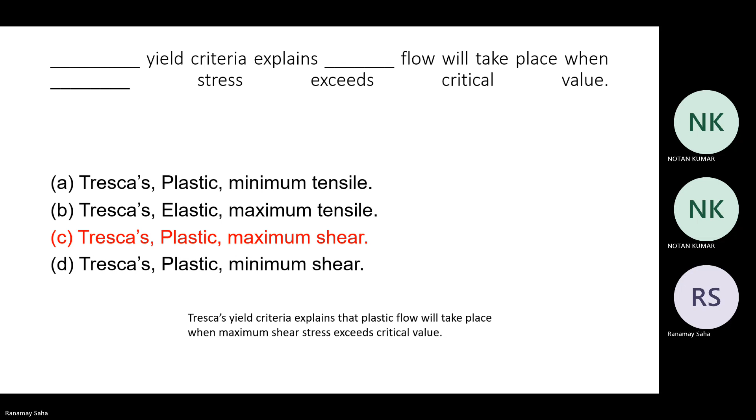So the first question you had to answer about some of the deformation theories. Broadly, Tresca's and von Mises theories, which you are already acquainted with. Now the question asked, the first blank is same for all the options, so you had only Tresca's criteria, and then Tresca's yield criteria explains what kind of flow will take place.

Now you all know that beyond the yield point, there is only plastic deformation. So the second option then goes for plastic, and then it says when the load stress exceeds the critical value. Now, because principal stresses are dealt with by Rankine's theory, in this case you have the maximum shear stress being the third answer here. The Tresca's yield criteria explains plastic flow will take place when maximum shear stress exceeds the critical value.

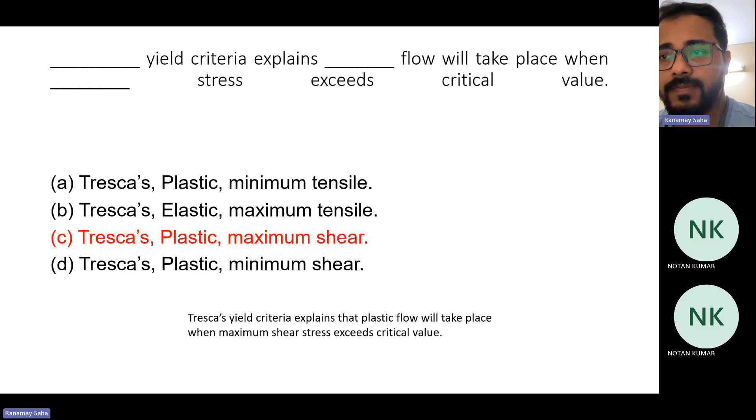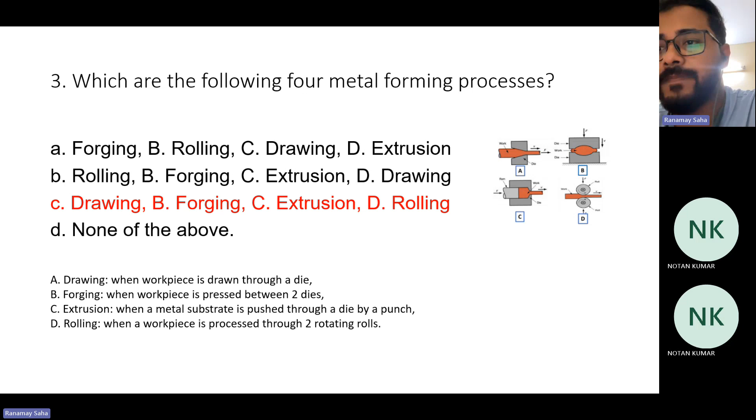The next question was: metal forming is caused by what kind of effect on the workpiece. You all know plastic deformation is the main reason behind any metal forming or change of material shape, right? So that plastic deformation should be the answer of this question, and the other options are wrong.

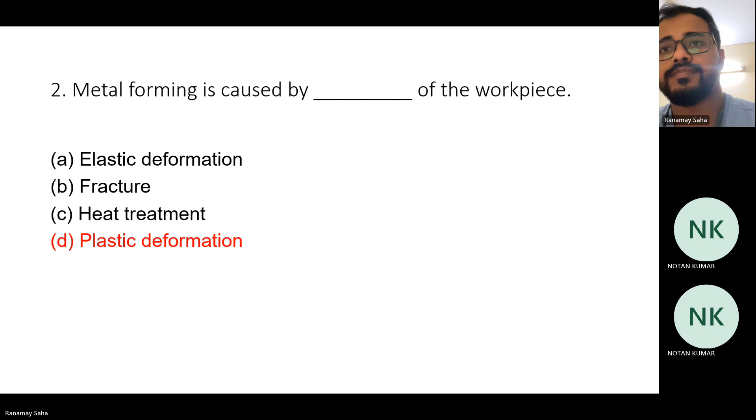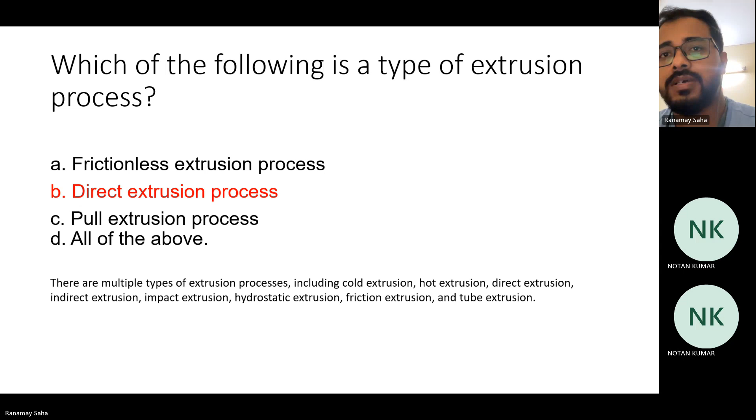Then, which of the following is a type of extrusion process? You know there are direct, indirect, and hydrostatic extrusion processes. In this case, option B comes within the limits of extrusion processes. There are multiple types, including cold, hot, direct extrusion, impact extrusion, hydrostatic extrusion, and friction extrusion. Option A is frictionless here, so that goes wrong. Option B is the correct option.

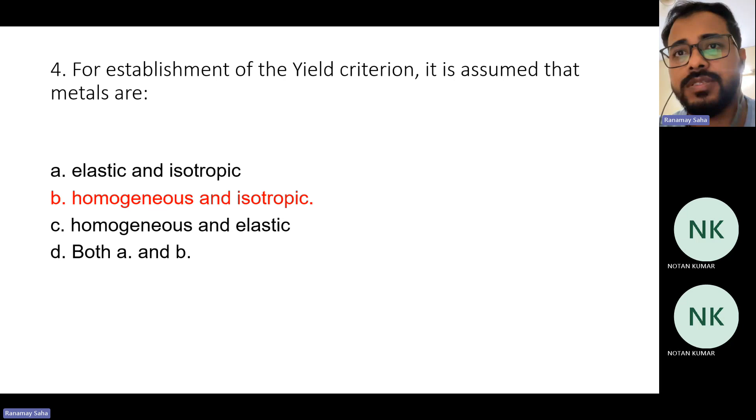The next question was about the establishment of yield criteria. It is assumed that metals are homogeneous and isotropic. We have discussed that in the beginning of the last session elaborately, so you can please have a look if you have doubts on this. There are two assumptions; the first one is considering the material as homogeneous and isotropic for the establishment of yield criteria.

Then, in a rolling process, the two rolls must rotate in opposite directions. Otherwise, if they rotate in the same direction, it will be difficult to actually draw or pull the sheet within the two rolls. So option A is again the correct option here.

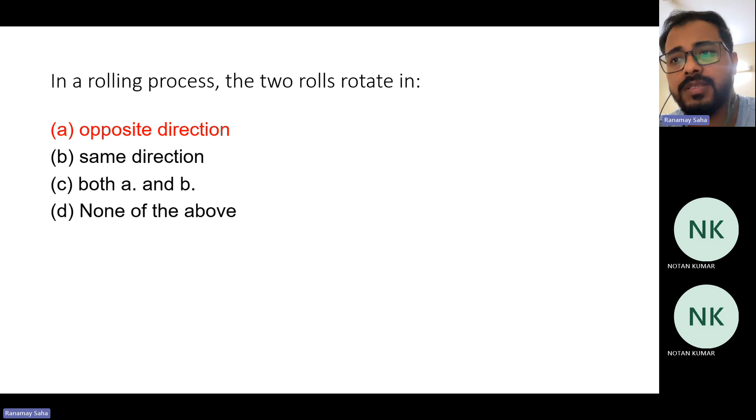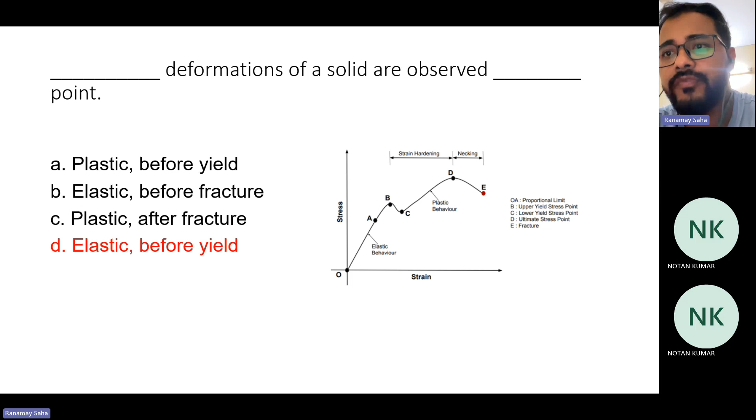The next question is: what will be the true strain in a metal specimen if it is stretched from one length to another. You all know how to find true strain. If you put the negative sign, it comes out as the natural log of final length to initial length. Just plugging in the values, final length is 25 centimeters and initial is 17.5. You can see that option C, minus 0.357, will give you the correct answer.

The last question was here. We have extensively solved much bigger problems from this kind of concept, flow stresses and strains. In this question, it was a simple solution. You have to find out the final true strain and flow stress, when the average flow stress is given as 493 megapascal, the strength coefficient is 680 MPa, and the strain hardening exponent is 0.25.

So you know when there are plastic deformations and non-linear strains that a material experiences, the average flow stress is given by the ratio of K, the strength coefficient, times epsilon strain to the power of strain hardening exponent n, divided by 1 plus the strain hardening exponent n. Just plugging in the values, where strength coefficient is given as 680, strain hardening exponent is given as 0.25, true strain is given as 0.675, the flow stress then becomes epsilon raised to the power n, so it is 616.25 megapascal.

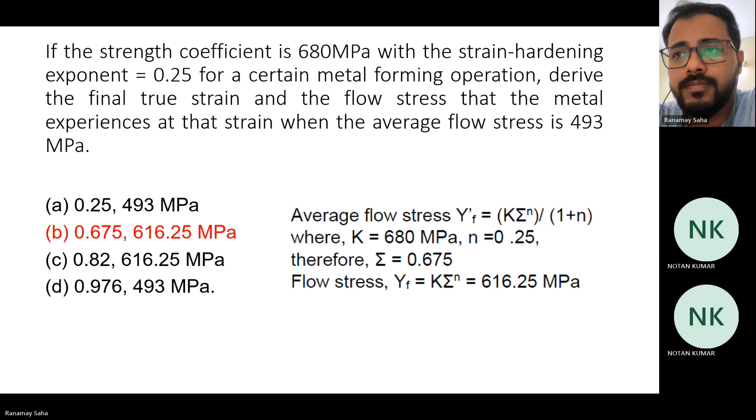Now we'll move ahead to solving some questions from the current content. I think you have come across this single crystal growth process called the Czochralski process. This question is based on that process. You have crystal growth of silicon at a temperature of 25 degrees centigrade. Convective heating is utilized to melt silicon at 1400 degrees centigrade. You have to find the pull rate of the seed through a fusion zone of 100 centimeter thickness, given that the heat conductivity of silicon is 2.3 watt per centimeter Kelvin, the latent heat of fusion is 1787 kilojoule per kg, and the density of silicon is 2.33 grams per centimeter cube.

Just to give you an idea, you must be aware of the Czochralski process, where we put a seed in a chamber where inert conditions are maintained, and as the seed is rotated and pulled out, the melt silicon simply gets attached to the surface of the seed, and as it is pulled out, we get the solidified silicon material. Now, one problem that arises is that some extra material also gets stuck, and that needs to be removed after the process is completed.

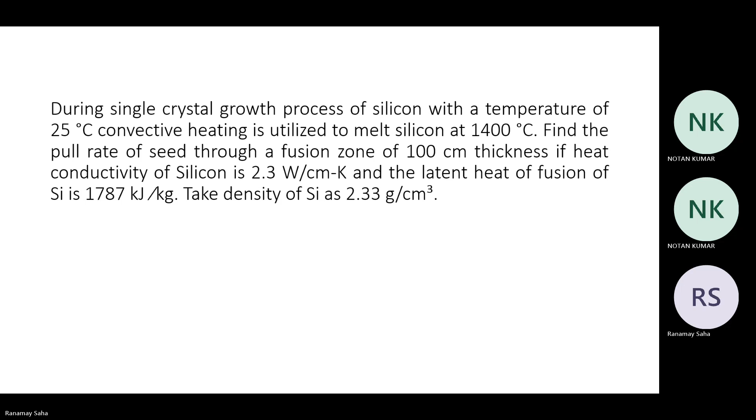So, Nutan, can you hear me? Yes sir, yes sir. I just had a chat with the NPTEL TA for this question. Now, in this question, you are saying the minus sign should not be there, right? Yes sir, why? Otherwise, the magnitude is correct. Yes. Magnitude is correct.

So for your information, if a wire or metal specimen is stretched, the stretching happens in the longitudinal direction. But when a material is stretched in the longitudinal direction, it can automatically be compressed in the lateral direction. So if somebody is talking about the longitudinal strain, it should be positive. If somebody is talking about the lateral strain, it should be negative. Here in this question, they didn't specifically mention whether it's longitudinal or lateral strain they're talking about.

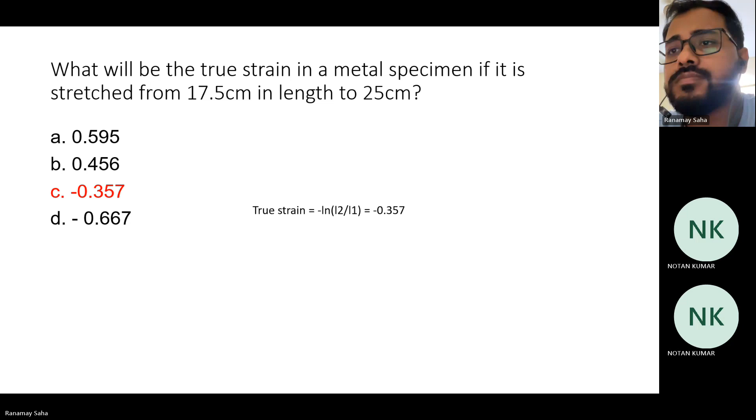But sir, please inform them about the three questions also. Yeah, don't worry. But the solution has already come out, no? Sorry sir, the solution has already come out. Sir, your voice is not coming clearly. What are you saying, sir? I am saying for the three questions from assignment six, I think you are asking, right? Yes, yes, yes sir. And why didn't you mention those in the last session?

Because by now, I think they have already graded that assignment. But sir, it can be changed, it can be regraded. So regrading has also been completed, no? But sir, I have mailed them, I have not informed you, but I have mailed them. But they have not changed the grade, I think they have thought their solution is correct. But I can clarify with discussion, so I thought I should join this live meet and inform you, and you can contact the NPTEL team and inform them. Okay, don't worry, I will forward it.

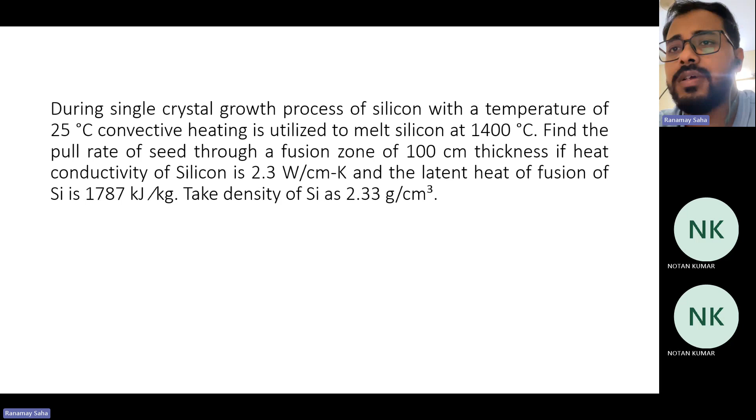So let's look into this question of single crystal growth process. It is a simple concept. You just have to think about what will be the heat transfer process happening while the seed is being drawn out of the melt pool. Right now, you have to equate the total heat transfer loss to the total heat transfer gain.

If you think about this rectangular part at the top of the screen, you can see the seed, where one side is connected to the molten melt side, and the top side is connected to the ambient, where solidification happens. So if Q1 is the heat transfer rate in the melt pool side, and Q2 is the heat transfer rate in the ambient side...

You have temperature T1 in the melt pool side and T2 in the ambient side, so T1 should be greater than T2. So T1 being towards the melt pool side, you use the Fourier law to find out the net heat transfer rate and equate it to the total energy transfer in case of phase change, given by latent heat of fusion multiplied by the mass flow rate, dm/dt.

K stands for conductivity, A stands for the area, and dt/dx is the thermal gradient. The coefficient L stands for the liquid melt side, and S stands for the solidifying upper ambient side. So you equate the total heat transfer rates, and then break down dm/dt, mass flow rate, into rho density multiplied by A and v, area and velocity.

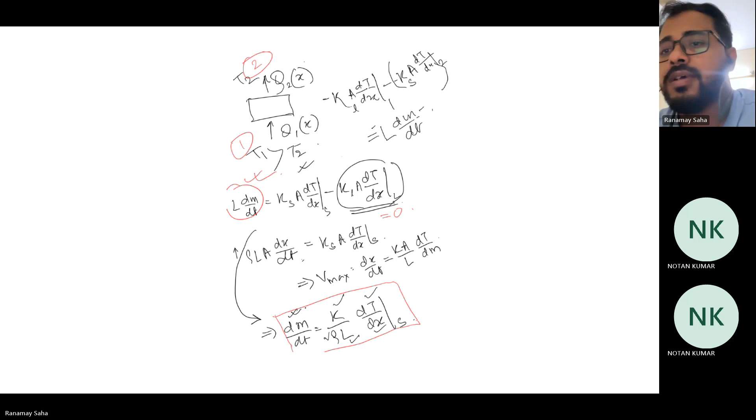Once you find this rearranged formulation, you plug in the values: the temperature difference is given by Tm and T-naught difference, which is 1375 degrees centigrade. From the question, the total distance dx is around 1 meter. Thermal conductivity K was given as 2.3 watts per centimeter Kelvin, converted to meter Kelvin by multiplying by 100, and the latent heat of fusion is 1787 kilojoules per kg.

The density is 2.33 grams per centimeter cube, which converts to 2330 kg per meter cube. Plugging in all these values, you find dm/dt as 9.1 times 10 raised to the -5 kg per second, which is the pull rate asked in the question. Take note of this, and then we'll proceed to our next topic.

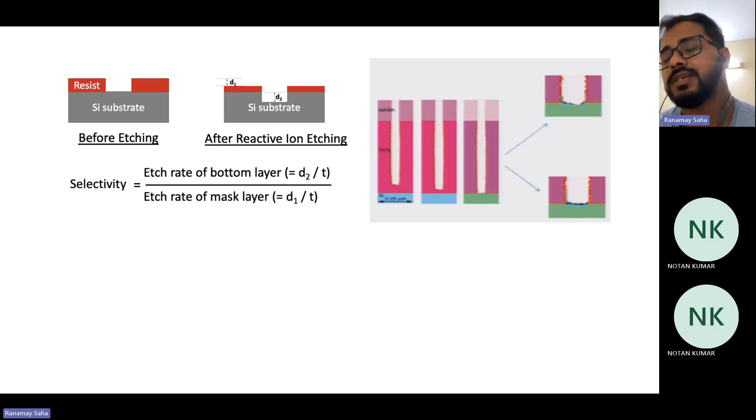In these two situations shown in the diagram in the top right corner, in the first diagram you can see the etch selectivity is really poor - it is low etch selectivity. What's happening is the bottom surface is getting overetched. In the second situation, you can see comparatively better etch selectivity, a highly selective etching process. So low etch selectivity gives rise to poor etching, and high etch selectivity gives rise to good etching.

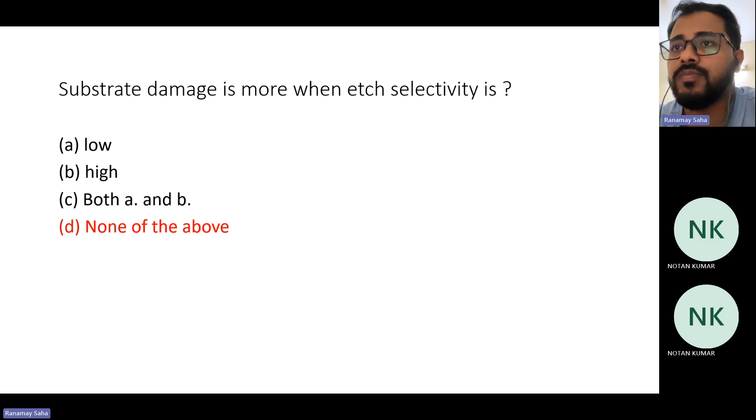Now let's come back to this question. It says substrate damage is more when etch selectivity is what? As per our discussions, substrate damage will be more when etch selectivity is low. Here the answer is wrongly marked. Option A should be the correct one here - substrate damage happens to be more when etch selectivity is low.

Now let's look into a question. A microchannel is being etched in a 100 planar wafer with KOH solution. You have to find three answers. First, determine the angle between the channel wall and the front surface - that particular angle is defined as alpha. If you look at the first diagram, it is the angle between AB and BC, the angle between the channel wall and the front surface.

The second question: if the top channel length and the etch rate are 100 microns and 1 micron per minute, find the bottom channel width after 20 minutes of etching. If you can find the top channel width, you can do geometrical calculations to find the bottom channel width. The last question is how long will it take until the etching process stops - find the total time of etching. Give it a try and then we will discuss the solution.

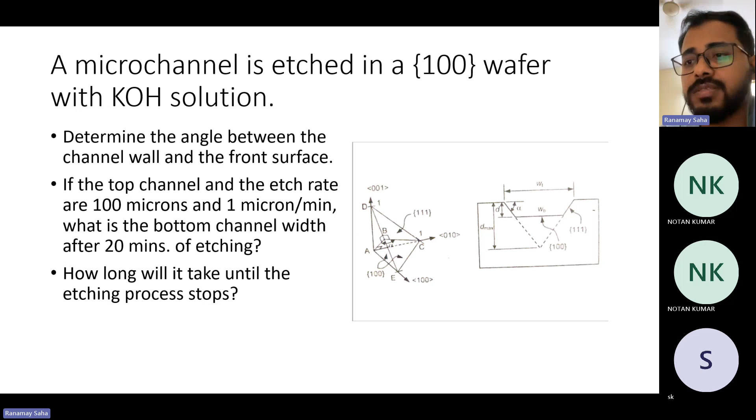Let us look at the solution. I have enlarged the part being asked in the question - the angle between the channel wall and the front surface. AE is a 100 plane, and AC is a 010 plane. Using simple tangent angle, you can find the length of AB to be root 2 by 2, since cos 45 is 1 by root 2. AC here is 1, as given in the question. So you find the angle as tan inverse of AC upon AB, which gives around 54.74 degrees.

The second question was to find out, after 20 minutes of etching, what happens to the bottom channel width. I've shown pictorially which part is being asked about - the bottom channel width. The top channel width is given as 100 microns, as you can see from the diagram, and the etch rate is given as 1 micron per minute.

If you consider that unknown portion length as d, it can be found as the etch rate, given as 1 micron per minute, multiplied by the total time of etching, which is 20 minutes. Multiplying that, you find the value of d to be 20 microns. Now there are two symmetric lengths y on both sides, which is the difference between the top surface width and the bottom surface width of the channel. So you can find y as d upon tan of alpha.

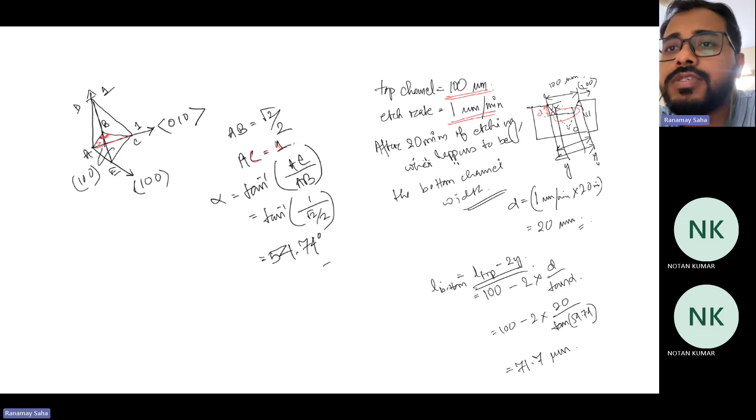Now we have the third question: how long will it take until the etching process stops? So now you know L bottom, and you have to refine it so that you can find the maximum stretch of the etching process, in order to find the time when the etching process stops.

In that case, you have to find out the maximum D. So D max, then from that equation you just have to reshuffle. You have to find what happens to the maximum d when L bottom becomes 0, so L top minus twice of D tan alpha, D upon tan alpha, equals 0. Just reshuffle and find D max to be 70.71 microns.

Once you have found D max, you can find the time by dividing it by the etch rate, since time is distance upon velocity. Here D max becomes the maximum distance of etching, and when D max is reached, the bottom channel length becomes 0. That gives you the time at which etching stops, when the process is completed and there is nothing left to etch in that hole, making it a through hole. That time is found by D max upon the velocity, which is 1 micron per minute, coming out to 70.71 minutes.

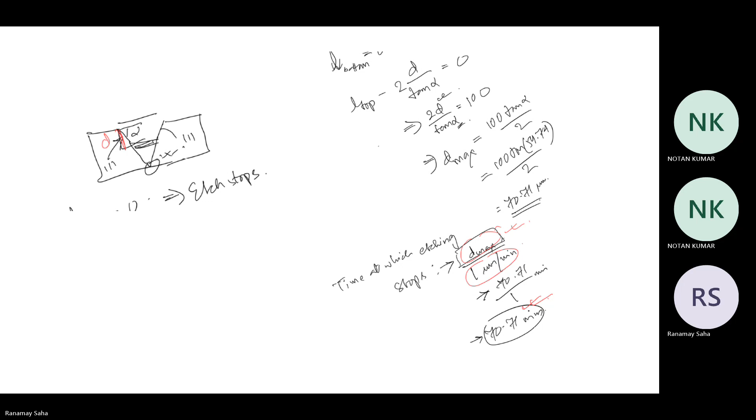So we have reached the last topic of today's discussion: the photolithography process. It's an integral part of micro manufacturing. Whenever you are making PCB boards or anything, since miniaturization is the need of today's industry, to save space and increase output, in any fabrication of such sort, photolithography is one of the most important processes in the micro nano manufacturing industry.

We will briefly look at what the photolithography process is. There are three major steps. The first is the positioning step, where you decide the optimal distance between the mask and the substrate. That is very important, because you need to know what photolithography is first of all.

Photolithography deals with positioning a mask in which a pattern is pre-inscribed, and then using that mask you expose some part of the substrate surface to incoming light, which may be a UV laser or an LED laser in advanced photolithography equipment. Then you decide, depending on what kind of coating material you have put on the substrate. You first coat the substrate with a material called a photoresist.

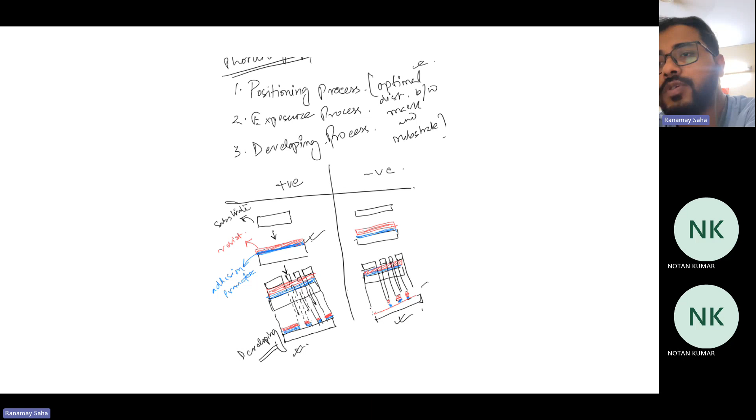In negative photolithography, it's the opposite. After step 3 it remains the same, but in step 4 the exposed region stays back because of strong bonding and cross-linking to the substrate surface, while the unexposed part, due to weak bonding, washes away during developing. So that is a brief overview of the photolithography process.

Looking into the detailed steps, first is substrate cleaning, to remove any dust or undesired particulate matter from the substrate surface. You clean it often with Piranha solution, then dry it with compressed air or compressed nitrogen flow, and then do the spin coating process through a spin coater.

What do you spin coat? You spin coat the photoresist material, then do the pre-baking to make sure the cross-linking has happened nicely, and do the exposure process where light strikes the coated substrate surface. You do the post-baking again to ensure there are no loosely cross-linked structures in the desired region.

Then you do the developing process where the undesired material is washed away. You again do the hard baking process, and then do the etching if you want to remove some material from the substrate. Suppose you are doing positive photolithography and have done the developing process, where the material has been washed out of the undesired region.

Now, in those regions, the substrate is exposed, and in the masked region, the substrate is unexposed because the photoresist coating has stayed back. If you want to transfer those patterns into the exposed substrate surface, you do the etching process. So what happens is you get the circuitry, for example, inscribed into the silicon surface.